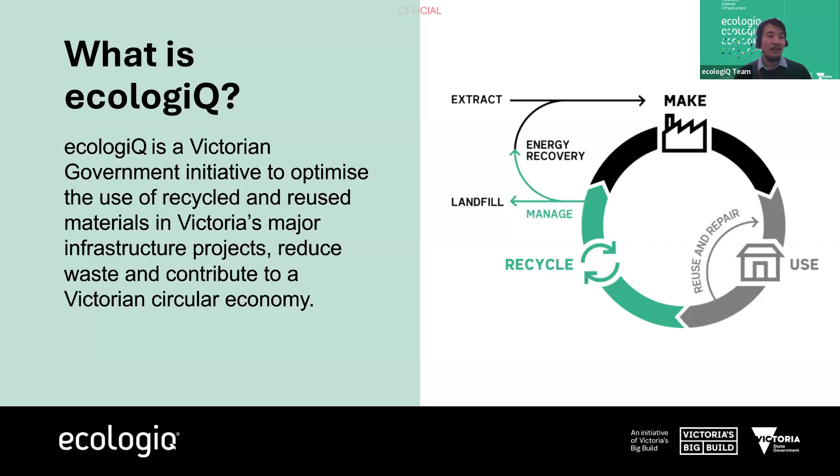We have a huge pipeline of works for the state, and with that consumption, I think how we do that really cleverly means that we can actually keep things at its highest order use and move towards that circular economy for Victoria.

And how the policy works is twofold. For all the road, rail, and tunneling projects that are in place that have this policy, it is about looking at each of these projects and how they might optimize use of recycled materials. We use 'optimize' because it needs to make sense from a carbon perspective, a cost perspective, an availability, constructability - all those elements - again, it's about what's best fit for purpose.

So it's not just about having tunnel vision around using recycled materials, but secondly, a report on the volumes and quantities of those materials, because the insight, the detail, is in the data and in the reporting. And with the updates from July 1, our Recycled First now applies to any Victorian government project of $20 million or more, not just our road, rail, and tunneling projects to date. It actually applies during the request for proposal, request for tender stage.

So it is a procurement policy. And then during delivery of those projects, reporting back to the relevant authorities - whether it's road, rail, or in this instance, the Victorian Health Building Authority - will be capturing data on how much recycled materials and content is being used in their projects.

And to date, we love a good infographic - over 5.8 million tons of materials have been used on the Big Build projects as recycled materials. That's enough to fill 2 MCGs worth. And you can see all the numbers that are there, but I think most importantly, since the introduction of the policy, we've seen a doubled uptake of recycled materials being used on the project. So it is working, having these policies in place.

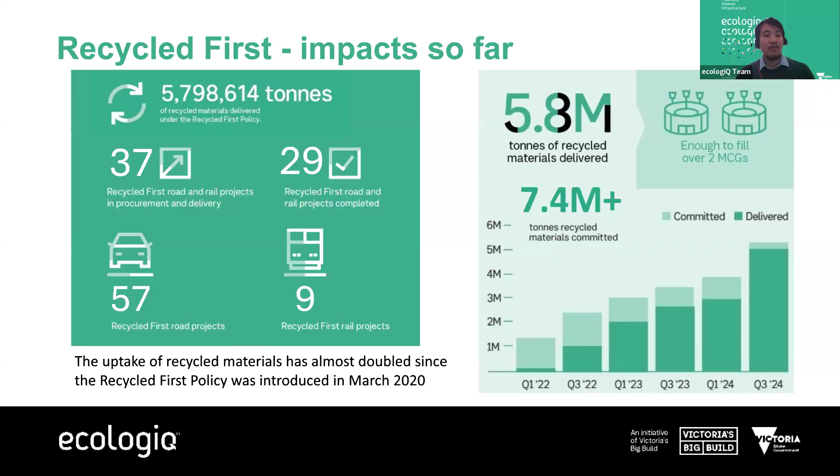I think what that means for you dialing in on this call is that there is a lot of opportunity here for you in the pipeline, and we're here to talk about some of those upcoming projects today.

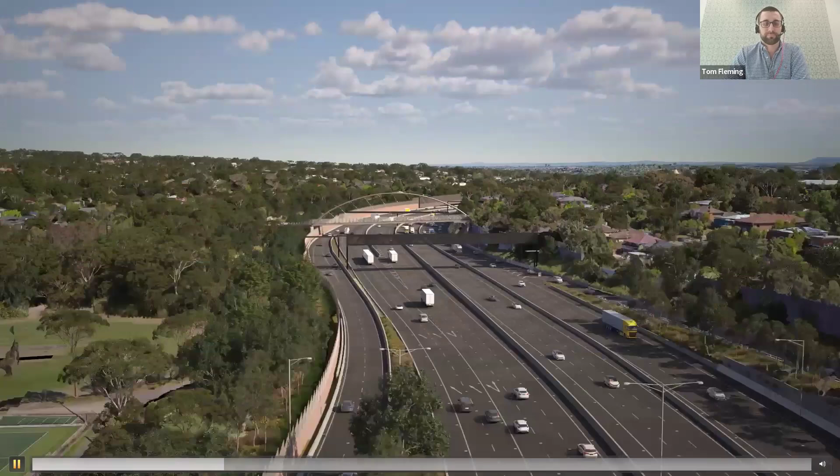We'll stop here just quickly. So we do have the busway that spans across the Eastern Freeway works, a major change that will be coming online. We also have the widening of the Eastern Freeway in general. We'll keep running through this and get a bit closer to our end of the package.

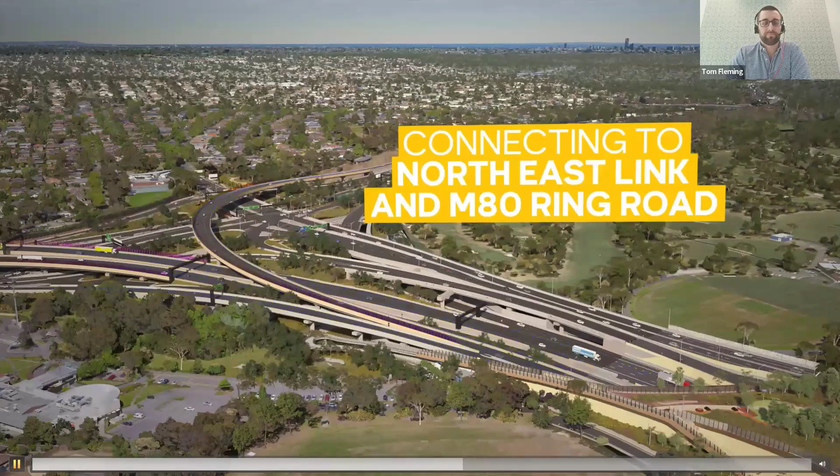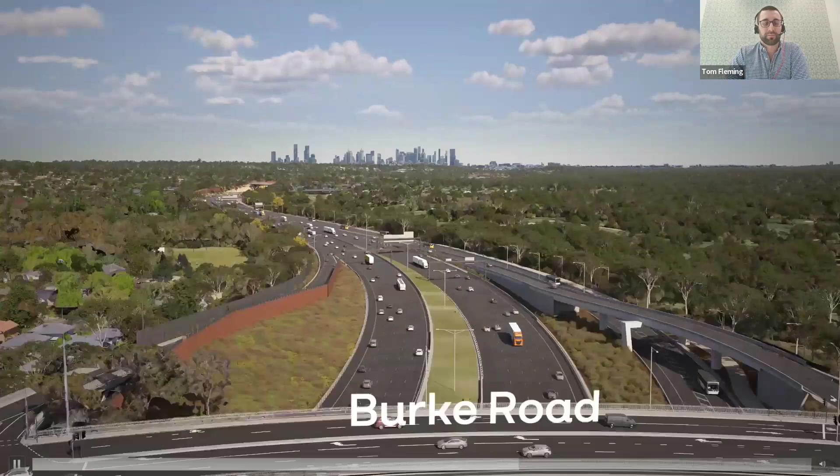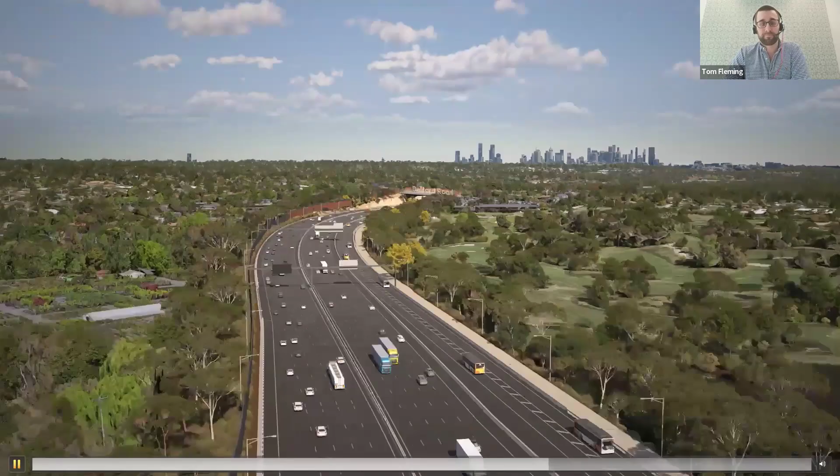I'll pause here. Our package begins at the Burke Road intersection, and we work all the way back towards the city, up to the Hoddle Street end of the job. As I fly through a bit further, a lot of the project will include an upgraded shared use path, creating more connectivity in this area which previously hasn't existed, as well as some extra lanes.

Some of the works here where we have a lot of structural elements is around the Chandler Highway intersection. We have the dedicated busway, which runs mostly on the north side of the road, to the right of your screen. At the Chandler intersection, the busway has a flyover that splits the dedicated busway into traffic, so buses heading into the city and buses heading out won't run alongside each other as we come to this point - that's where they separate. So there's a lot of structural work going on in this area, as you can see from the highlighted bits.

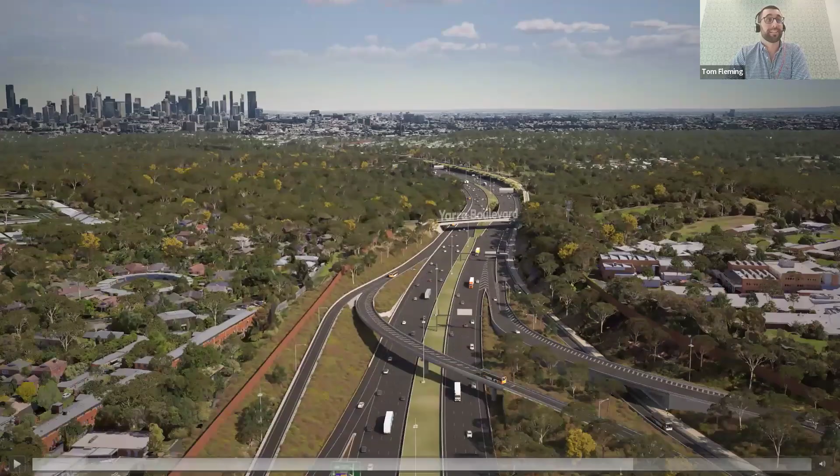One of the other key features we've got is working right over the Yarra River. We have a structure where we're building a shared use path bridge that spans over the top of the Yarra River. It's quite a sensitive area, and it's a big part of our urban design strategy to maximize that opportunity there, which we'll talk about in more detail soon.

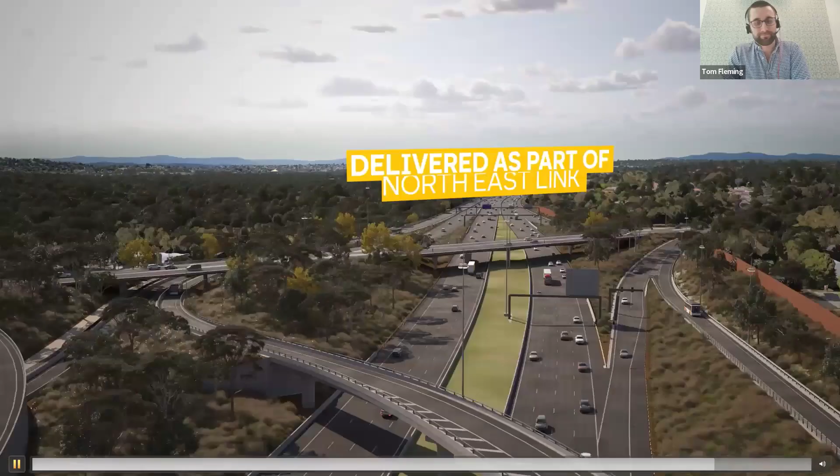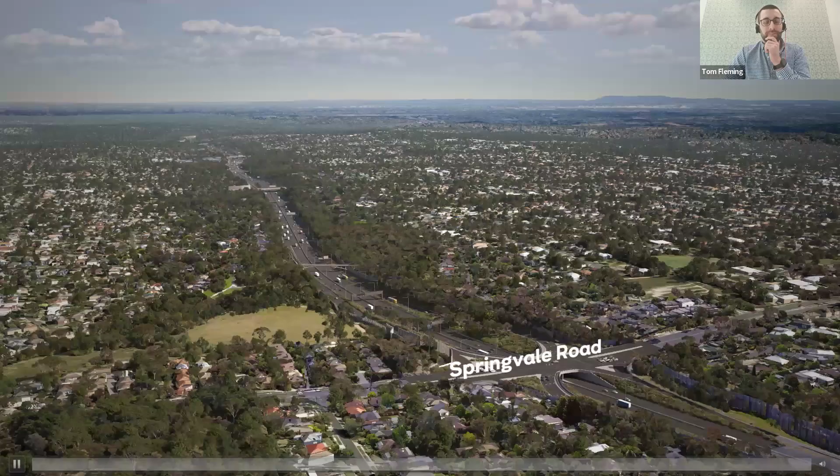All right, so it's a very quick fly through, but hopefully it gives a bit of context of where our project sits in the greater program for the Northeast Link. As this image shows, we do sit down here on the western side of the freeway.

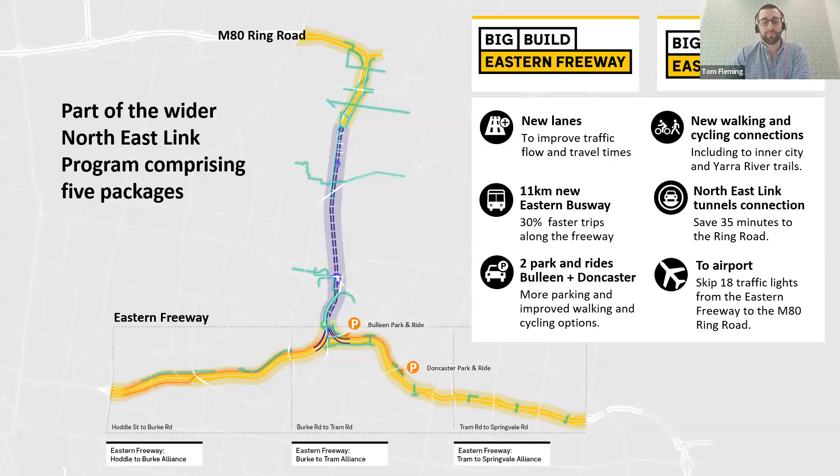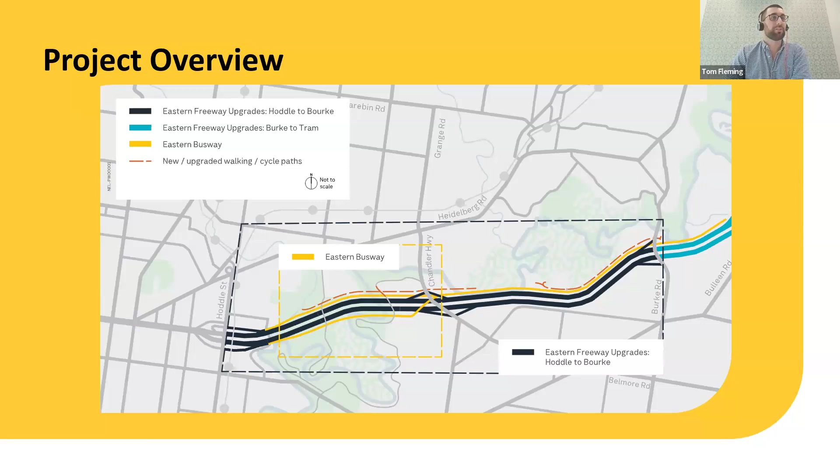This is a bit more of a project overview here. The upgrade of the lanes is highlighted in black. We have the dedicated busway along the yellow lines here, which splits off as we come into the city, and the shared user path runs along the northern end of the project.

Some key stats about the scope and features: it's about 6 kilometres of road being upgraded between Hoddle and Burke, with an additional lane in each direction east of the Chandler Highway, and some new exit ramps at the Chandler Highway and Burke Road intersections. There's also the entire new Eastern Freeway busway, which runs from Merri Creek to Burke Road.

There's an extensive length of shared user paths that will be built to connect pedestrian movement in this area, 3 new road bridges, and a new steel truss shared user path bridge over the Yarra River. Then there's associated work such as upgrading drainage, the inclusion of ITS and retaining walls, and some new noise walls being replaced across the project.

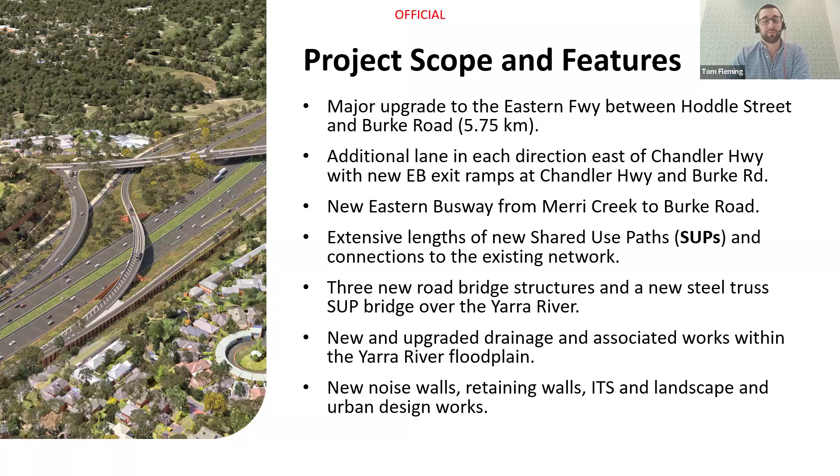Some of the key design themes we're looking at for the project: really respecting the original design of the Eastern Freeway. It was quite an advanced design for when it was first built. If you've driven through the area, there are some really big cuttings where you see a lot of the big rock faces, so we're trying to design into those original themes and the landscape that exists there currently, and improving the active and public transport connections, the busway and the shared user path.

It is a very environmentally sensitive area, especially around that Yarra River bridge area, with some pretty sensitive species around there. A big part of our design has been co-designed with the Wurundjeri Woi Wurrung to try to maximize opportunities of integrating that cultural element into our urban design strategy, and really delivering sustainable, future-proofed outcomes.

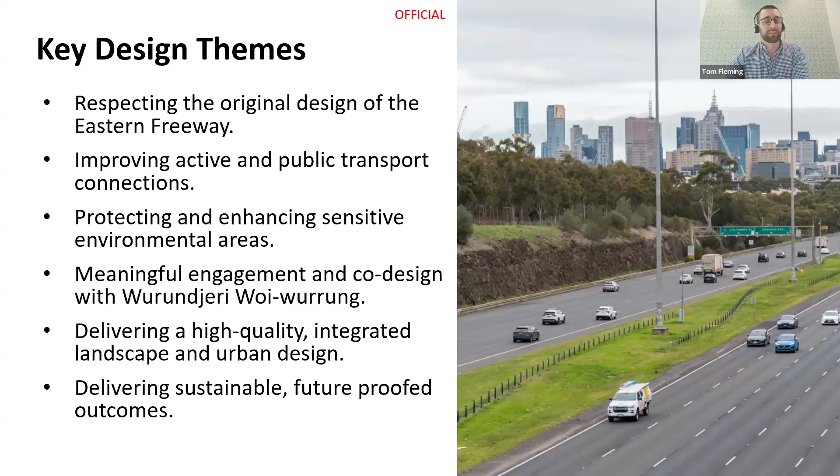These are some of the renders of the project. Some of the interesting elements like the shared user path bridge - it's a large steel truss bridge that incorporates a lot of the elements of our urban design strategy. It's a corrugated Corten steel structure to really tie into almost the tree landscape in the area. That would be a really key feature of the project.

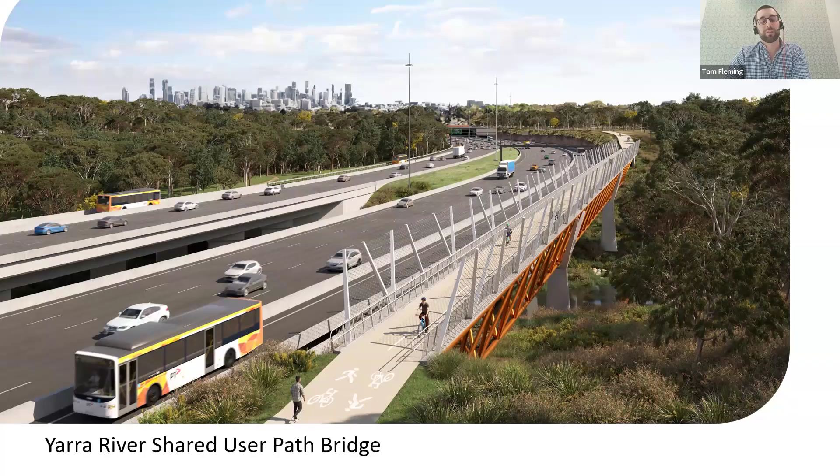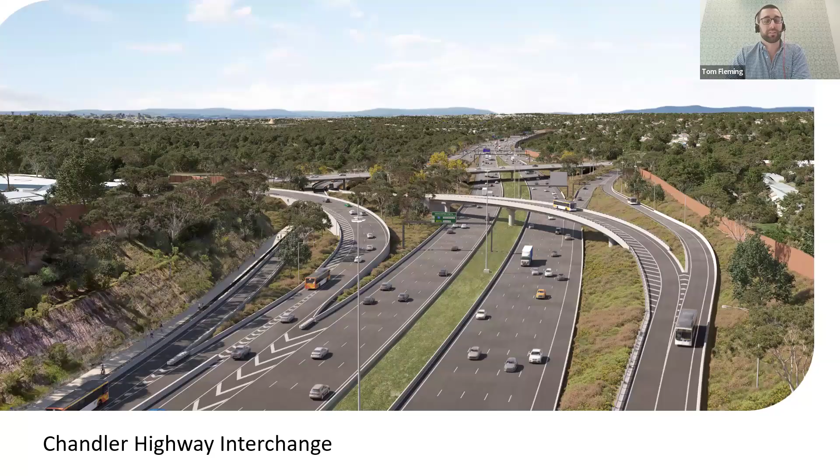Then here, the Chandler Highway interchange is the big aspect, with the busway flyover to separate heading into the city. You can see here as well there's a bit of an underpass for the buses heading out of the city, and these ones flying over to enter from the southern side of the road.

In terms of some of the key design elements and packages we'll be procuring: we have the ITS, which includes the ITS conduits, pits and pipes, along with a lot of the gantries that will exist on the project. Then there are the structures, largely around some of the bridge elements.

We do have a lot of concrete, steel reinforcement, steel box girders, bridge railing, and precast bridge beams. There's a large quantity of asphalt and concrete for our pavements when you look at the widening of the job, and the concrete for the shared user path.

For retaining wall structures, we have some RSS walls, RSS wall backfill, and some L-shaped walls across the project. Then for roadside structures there are gantries, some anti-throw screens for the pedestrian bridges, and a lot of roadside concrete barriers - we'll get into quantities shortly, but it is quite a large portion of the job.

The noise walls are a plastic noise wall, and they're a really key feature in the area for our urban design elements, tying that into the existing landscape. General landscaping across the project will be done as well.

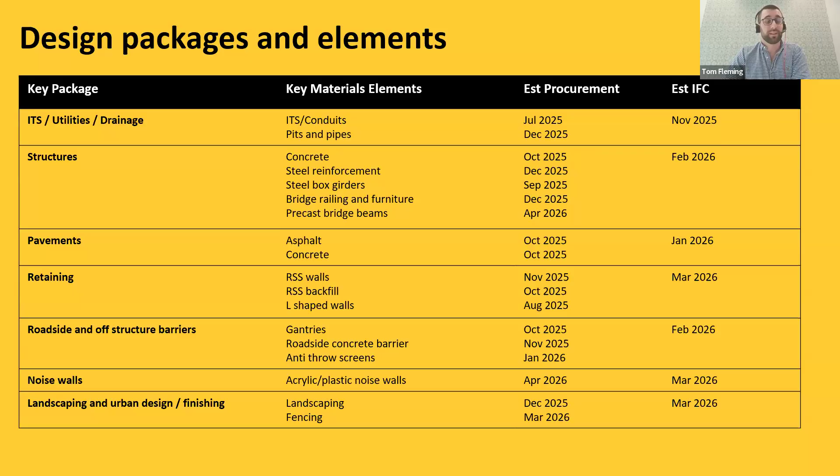Just to give you some context of the quantities we've estimated so far for the project, given we are still very early in design: we've got over 12,000 cubic meters of structural concrete, 3,000 tons of reinforced steel, structural steel in terms of the trough girders being 1,200 tons, and the truss being 100 tons.

For the noise walls, we've got over 3,000 meters, and that's about 20,000 square meters when you look at the panel square meterage. The asphalt across the job is 150,000 tons, and we have large lengths of drainage - 16 kilometers, with 2.7 of that being slip formed, and 250 drainage pits across the project.

As well as that, the barriers I mentioned are a huge aspect - we've got 15 kilometers worth of barriers being installed on the project for that lane separation.

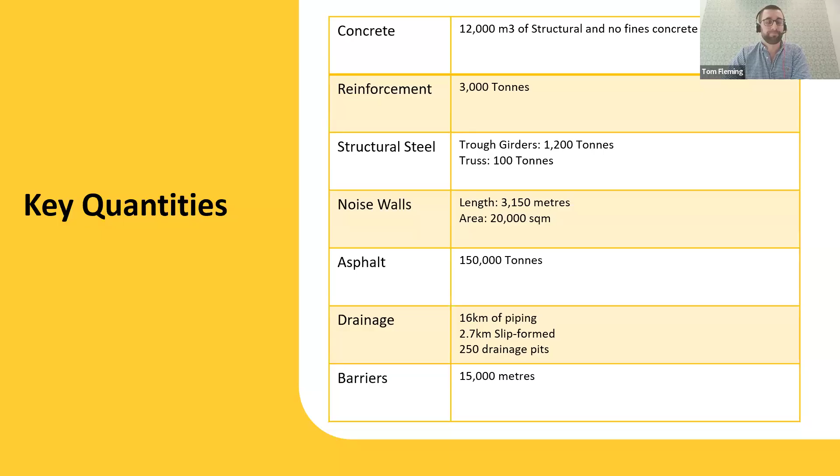This ties back into some of our requirements on the job, and from a sustainability lens, working under the environmental management framework which all the Northeast Link projects will be working under. Some of our requirements here also tie into the IS rating that the project will be undertaking.

In terms of these requirements, we've got a 15% reduction in CO2 from materials only, which excludes any of the on-site energy use across the project. We've got a 40% reduction in Portland cement target, a 15% use of recycled materials, which excludes our RAP quantities as well, and a 50% steel by volume to be sourced from SSA accredited suppliers.

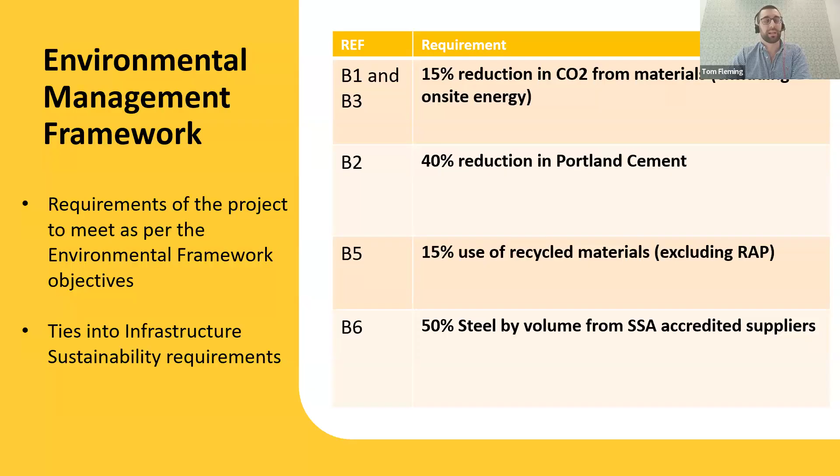So we'll talk a bit about what our resource efficiency strategy is and how we look at achieving some of these targets. When you start talking about the 15% reduction in CO2 from materials, the 40% reduction in Portland cement, and the 15% use of recycled materials, we've got to look at each of the elements on the project and come up with minimum requirements to make sure we are working towards achieving them.

This is a bit of a summary of what our cement replacement strategy is through SCMs. For our piling across the job, the opportunity is to really maximize that SCM with a 70% minimum target. We also have a 50% minimum target for all of our other in situ concrete products and elements, and a 30% minimum requirement for any precast elements on the project.

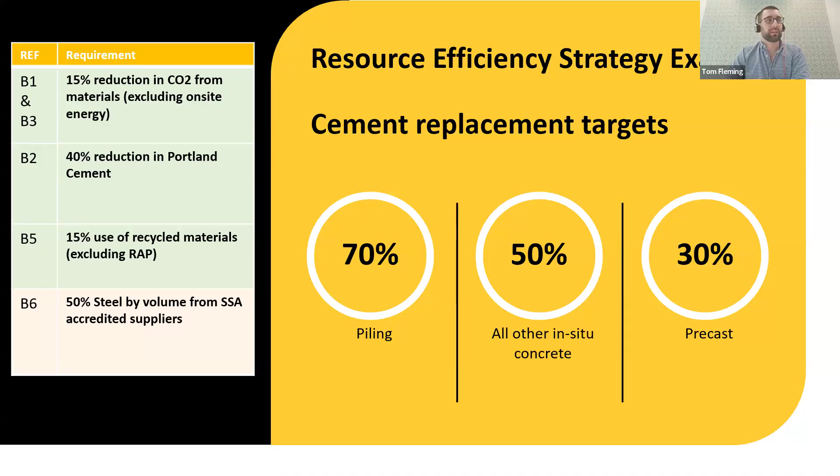This is just a bit more detail on some of our requirements across the job that we'll include in our procurement process for packages involving these elements. We've mentioned concrete, but for our reinforced steel, we are targeting an 80% minimum recycled content. For aggregates, we are trying to push for 100% recycled concrete.

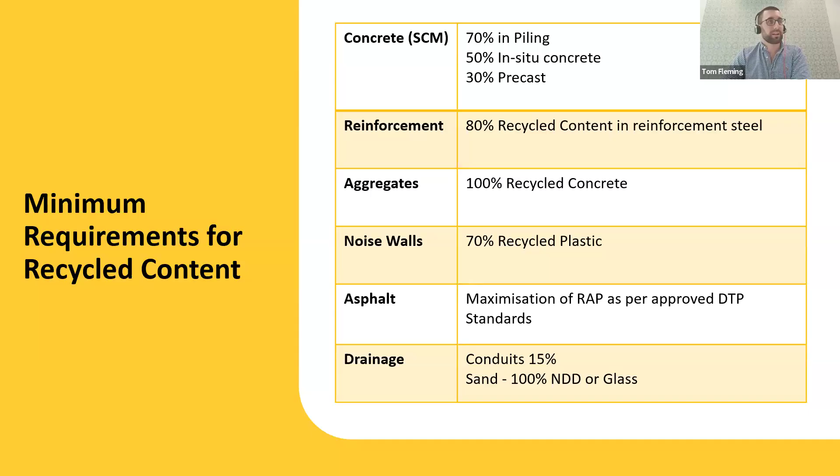In our noise walls, also a 70% recycled plastic content. In terms of asphalt, just achieving our maximisation of RAP in the approved DTP standards. And when we look at drainage, we've got conduits and some of the drainage backfill sand, which will target a 15% recycled content in the conduits and 100% recycled sand, whether that be NDD, recycled sand or glass.

I think just to wrap it up here, some of the initiatives we have been looking at to try and achieve some of these targets. I'll cover off a couple, but eco straps for the RSS walls, which is a good reduction in steel and the ability to use some site-won materials backfill.

We did mention the plastic walls here, with 70% recycled content. Megaflo Green we're using across the job, which utilizes HDPE recycled milk bottles and has improved drainage performance. Sense600, which has a 39% reduction in embodied carbon, as well as an additional 16.6% recycled content from their typical reinforcing steel. We do have some elements where we're looking at GFRP posts to replace traditional steel.

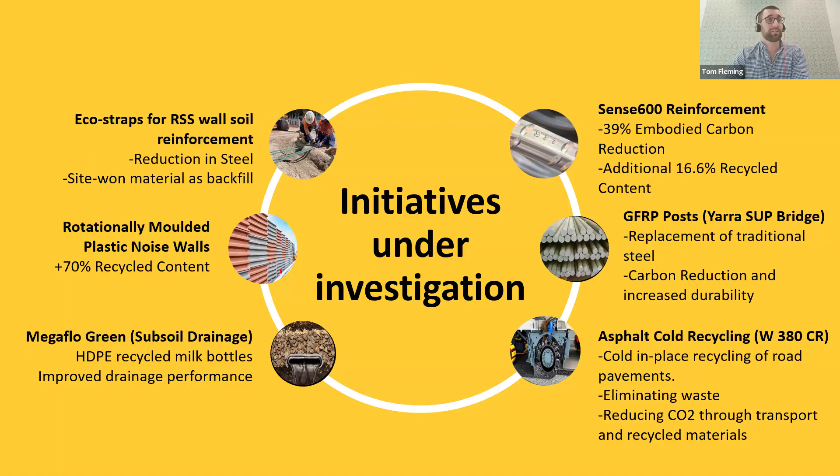And then we've also got the opportunity for asphalt cold recycling on site, which eliminates that RAP entering the waste stream and allows us to reuse it there on site, reducing more CO2 from not having to transport the materials to and from site. And that's essentially it for our project.

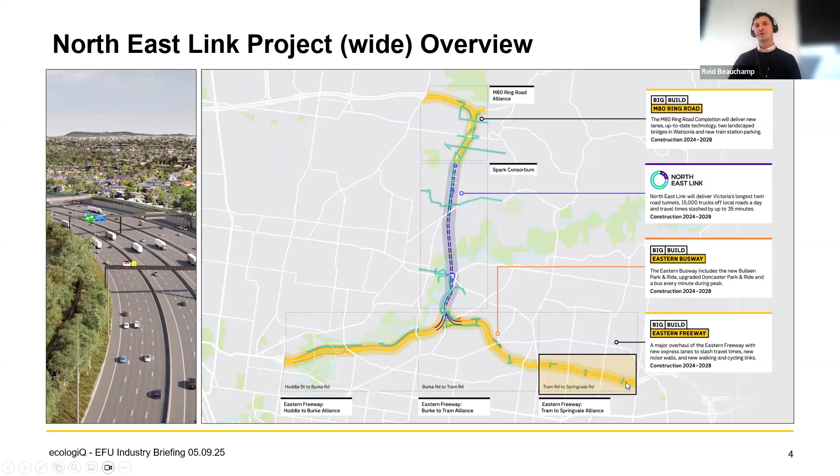We are in the midst of design, so we've been undertaking site investigations along the freeway to inform our design and planning. Design is underway across a variety of disciplines, and procurement activities have begun. Throughout September, we'll be setting up work sites and rolling out safety barriers to support some of the major upgrades. Design will ultimately be undertaken through June of next year for a lot of the key packages.

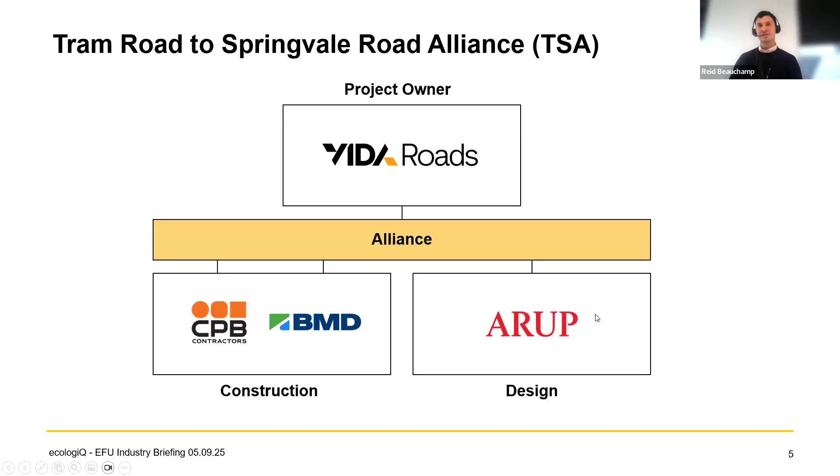So who are we? TSA, the Tram to Springvale Road Alliance, consists of ARUP on the design front, with CPB and BMD supporting construction, and working closely with VIDA Roads on behalf of the state - an alliance model to really support a collaborative delivery approach for this project.

In addition, it has noise walls, similar to how Tom was able to show in his presentation. We've got some rotationally molded noise walls, as well as existing noise walls we've been able to retain, and some concrete noise walls to support flood mitigation as well. There is landscape activity and design across the alignment that supports some of the broader shared user paths activating those areas.

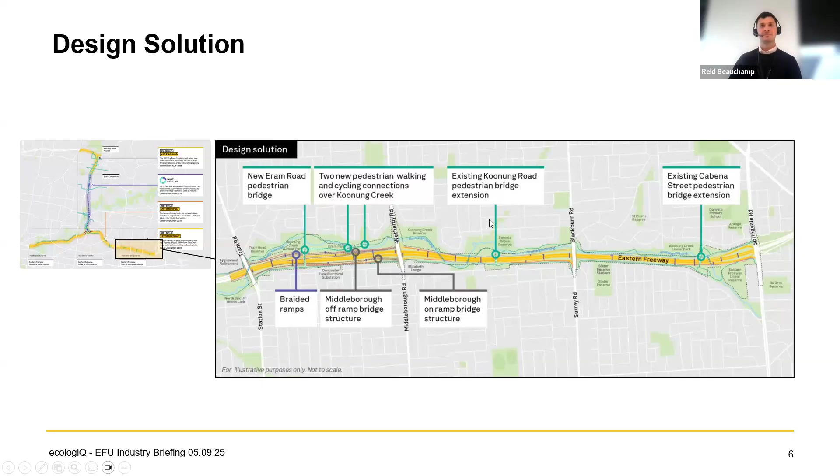We have ITS, or Intelligent Transport System infrastructure, being designed all the way through commissioning, and we have express lanes and collector distributor carriageways across the alignment. Lastly, as part of pedestrian connectivity support, there is replacement of pedestrian overpasses and extension of some existing pedestrian overpasses as well.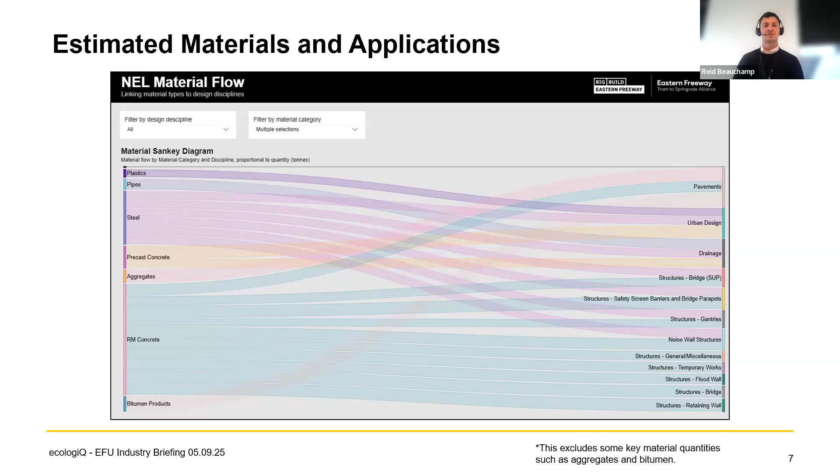We have about 200,000 tons of concrete that we're looking at for the project, a significant amount of asphalt and aggregates, as you would expect. And we have a similar quantity of steel, both for reinforcement on existing structures and walls along the alignment, as well as plastic noise walls and piping across the roughly 5 kilometers of project.

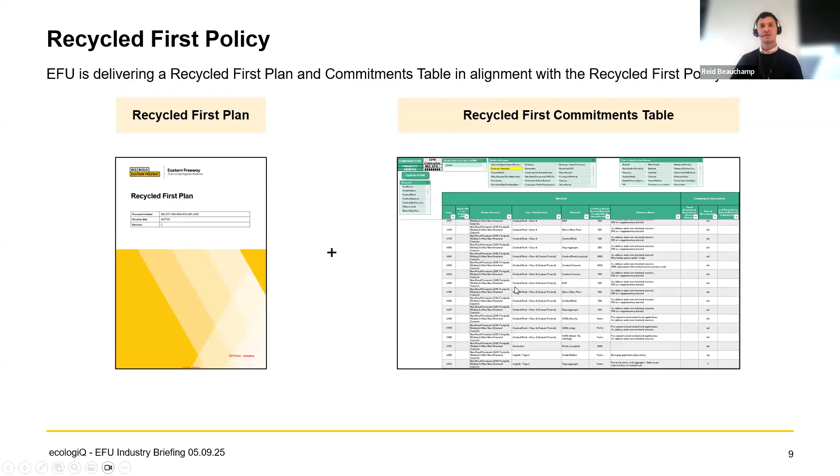Because we've been pursuing this in alignment with the Recycled First policy, we've developed our plan and commitments table, which is ultimately a tool for us to identify opportunities and really prioritize the adoption of recycled and reused content products across the project. I'll get into that in just a moment. But it's worth acknowledging that reusing resources and materials and prioritizing recycled content products really helps support a number of the project targets we have.

Similar to Tom, some of these targets are included within our project requirements and specifications. In addition to having a broader recycled material target of 30% across all materials, it's also a key contributor towards our material impact reduction targets, our Portland cement reduction targets, and prioritizing reuse is really helping with waste diversion as well. We are looking to prioritize sustainably labeled products, so wherever there are EPDs and disclosures that improve transparency within the supply chain, that's something we're really trying to prioritize. Ultimately, any solution we look to adopt, we want it to address as many of our targeted outcomes as we can.

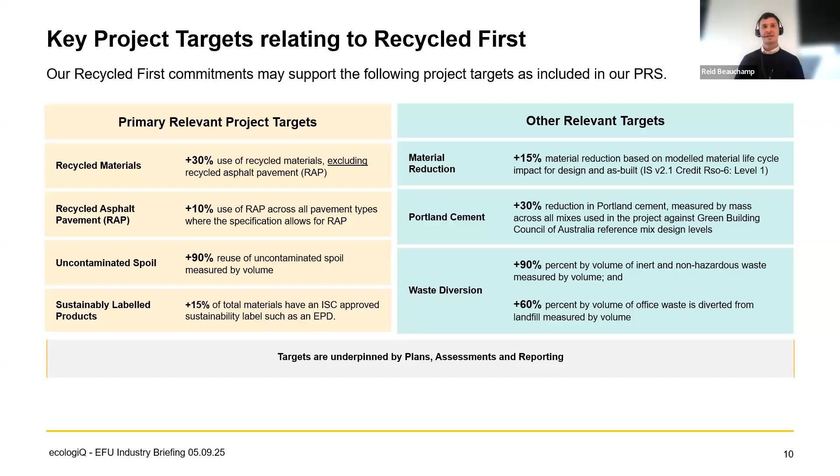So we've split some of the opportunities up across application areas. We have 6 application areas that we use with these little visual diagrams to simplify and give an overview of the opportunity. We'll start with our civil and pavements, run into drainage, services, some structures, and of course our earthworks, landscaping, and urban design aspects for the project. And then there are a variety of smaller but still important construction activities and temporary works scopes that we want to acknowledge as well.

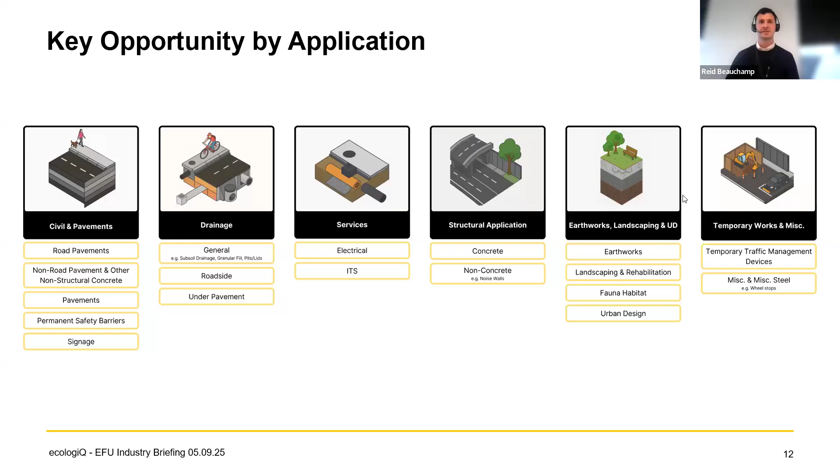Across the alignment, of course, there's a lot of pavement, a lot of civil work. So we are looking to maximize the recycled content allowable across that for all of our asphalt types. I've noted some of the key types, VP, H, type SS, and SF. And we're really trying to adopt the maximum that we can with what's allowable within standards, and looking at that for our subbase as well.

So our asphalt and all of our aggregates that make up the core of the pavement, we're looking to maximize the recycled material for, as well as looking at some of those high impact areas like our concrete use. Really looking at our cement replacement with supplementary materials across in situ, precast, and larger elements as well, like piling.

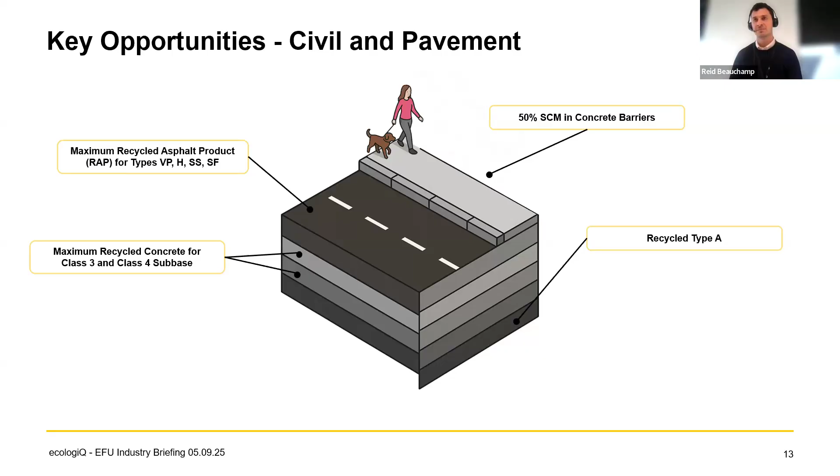For our drainage, we have quite a lot of reinforced concrete pipes, so varying classes, class 3, 4, 6. And we have some recycled plastic, like subsoil drainage, that you'll see along the alignment as well. A number of concrete pits, concrete culverts, head walls, geotextiles or geosynthetics. And a big piece of this is just trying to get the details right.

Like, of course, we have a lot of concrete on this, as I mentioned. And so we've really been looking to target that and get those commitments integrated throughout design documentation and throughout our procurement.

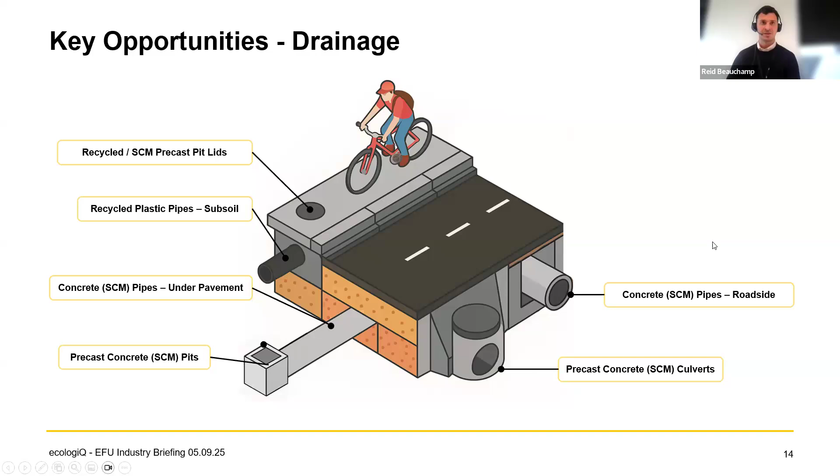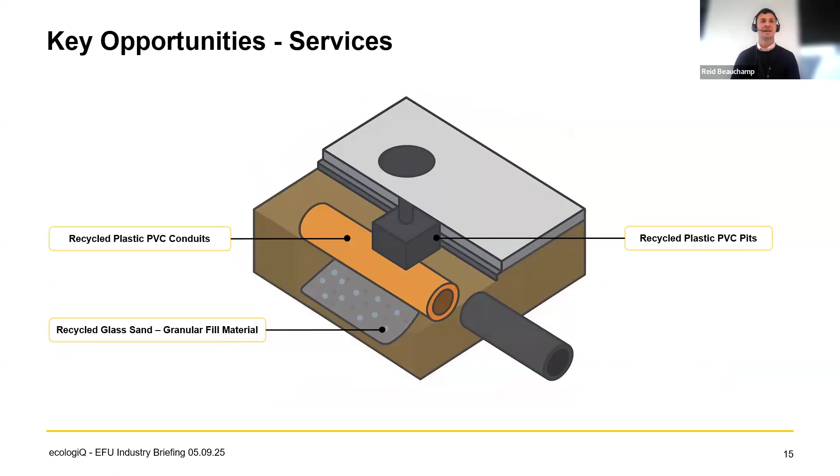For services, we've got services all the way up and down the corridor. So looking to maximize the recycled content within those PVC conduits to the extent that's available, as well as the aggregate, both for backfill and recycled glass sand.

For a number of our structures, we have everything from large noise walls to some flood walls. We've got large piers, abutments, and bridges. As I mentioned before, each of these are being targeted in a similar fashion to what Tom had presented there, looking at different types of applications.

And we have set targets for our precast at 40% as a minimum, 65% and above for our in situ concretes, as well as big elements and piling. So that's, again, targeting those high impact areas where we can and trying to dial up the replacement as feasible.

And then things like slabs, shared user paths, we might have 50% or above. And of course, with our large extent of noise walls, we're looking at rotationally molded plastic and maximizing recycled content within those plastic walls.

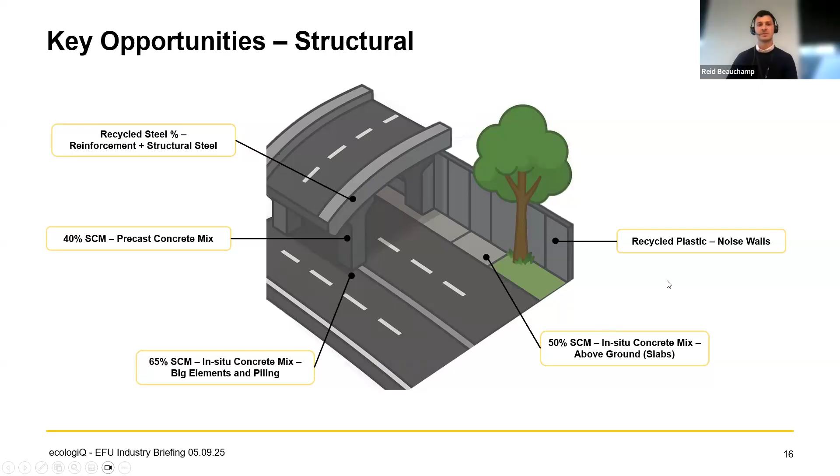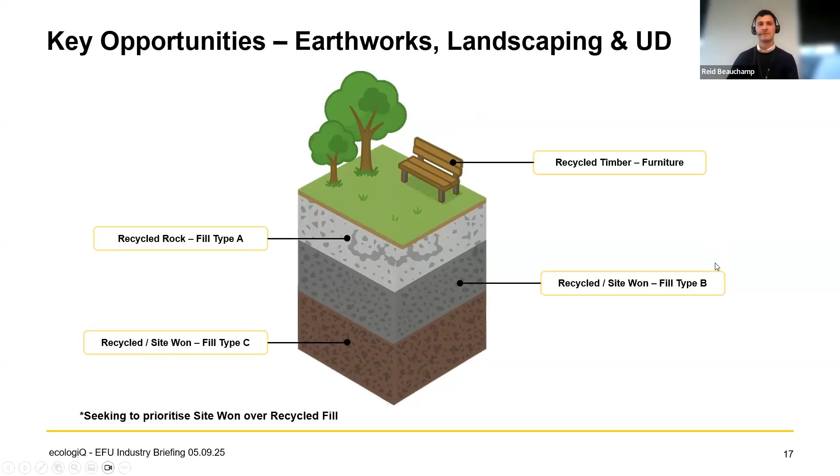We're really trying to prioritize as much reuse within the project boundary as we can, but of course where we're needing to import from elsewhere, we're looking at recycled content for everything that we can.

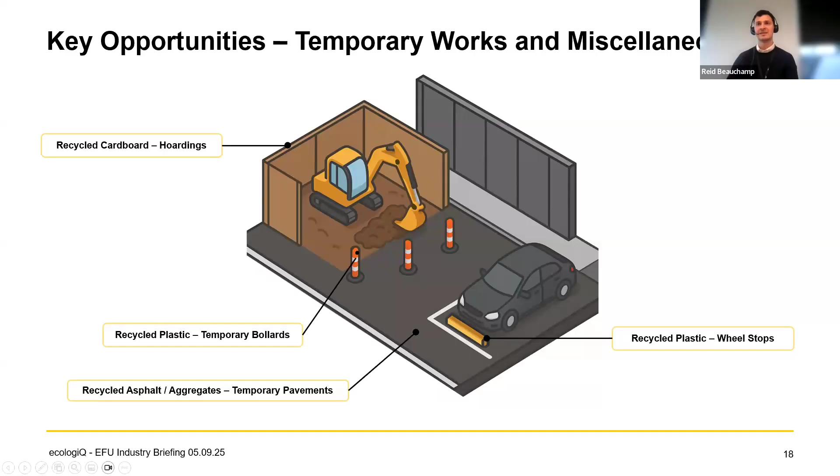As far as what opportunities you see, and if anything in alignment with this scope seems like an opportunity, if we haven't already been in contact, it would be really great to unpack each of these opportunities a little bit further. So that's it from me. If anyone has questions.

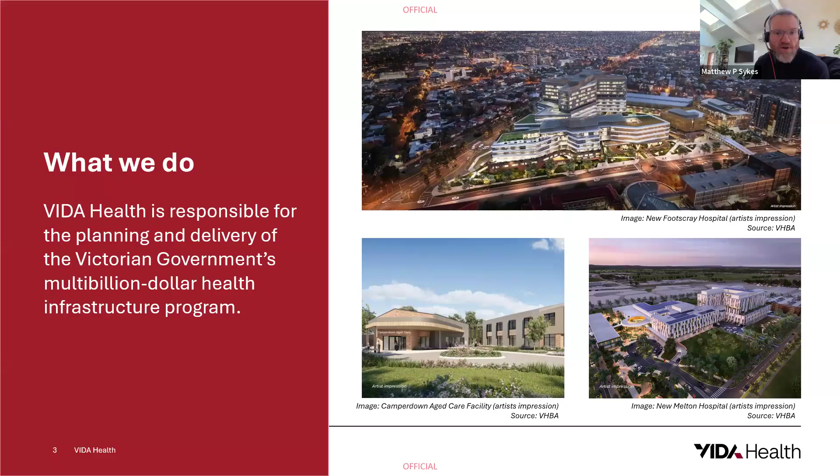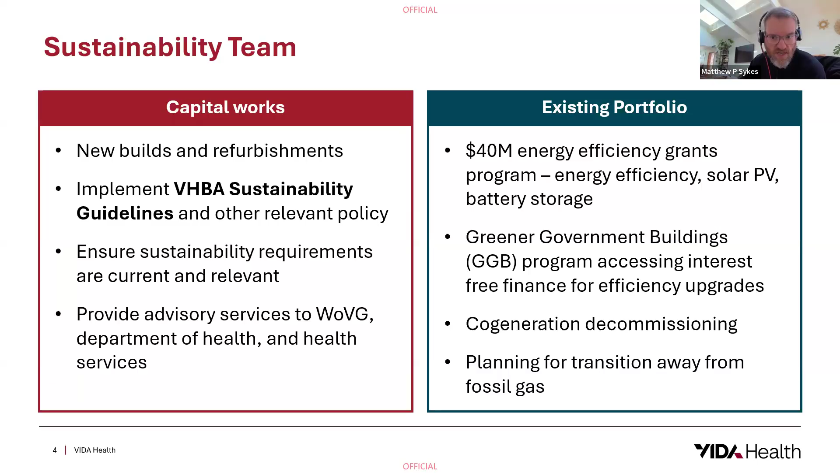I'll now hand over to Rachel, who'll talk a bit more about the expansion of Recycled First to our sector, and how that's going to impact our projects going forward.

Great, thank you Matt, and hello everyone. We're excited to see the Recycled First policy being expanded to all government infrastructure projects and look forward to seeing the benefits of this in the health space.

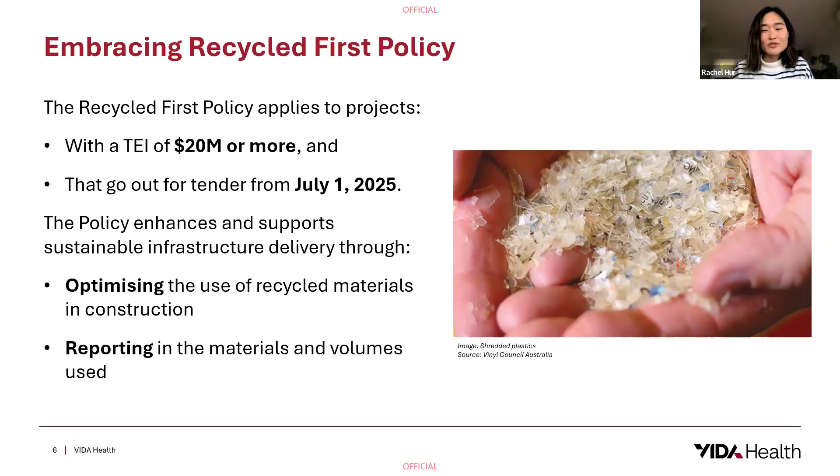At VIDA Health, we're excited to be implementing the policy as it enhances existing requirements for recycled content in health infrastructure, provides opportunities to optimize the use of recycled materials, and includes all the processes required for reporting. As Matt mentioned, the VHBA sustainability guidelines are an existing set of guidelines applicable to our capital works projects, and these already include requirements for recycled content, though in a limited capacity, for example in asphalt or curbing. So the policy is a great opportunity for innovation across other building materials, such as vinyl, which is just one example of a very widely used material in hospital and clinical interiors.

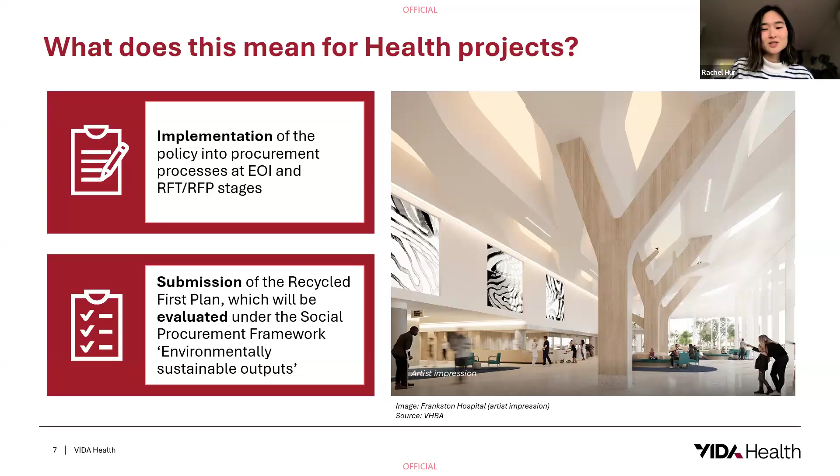Additionally, there are already requirements to include some recycled content materials under the sustainability guidelines, as mentioned previously, and projects may have already considered additional opportunities for recycled content materials in the design phase, specified in contract documents. Within the Recycled First plan, these can be included as commitments, though tenderers are still encouraged to demonstrate further innovation.

At VIDA Health, the way we do procurement is that materials are not specified or directly procured by us, the agency. Instead, materials are either specified, or there are performance requirements within the contract documentation packages, whereby suitable materials are then procured by the contractors.

So how can industry be involved? Firstly, you can make yourselves visible to builders tendering on projects, demonstrating understanding of the policy intent and requirements. Secondly, industry can work with or seek assistance from the ecologiQ team, who are very friendly and helpful. Lastly, they can seek opportunities to showcase capability and advocate for recycled material optimization.

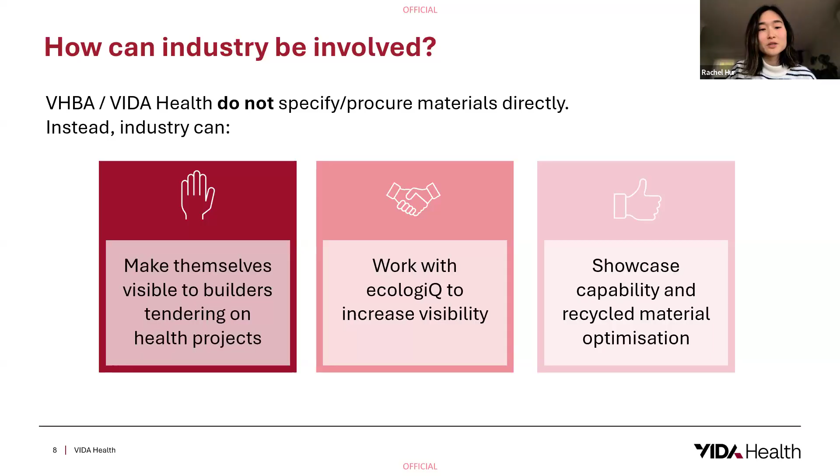I'll now pass over to Lauren to present a health case study where recycled content materials were successfully implemented, even prior to the announcement of the policy expansion.

Thanks, Rachel. I'll be giving an overview of the Frankston Hospital redevelopment. This is a $1.1 billion project delivered through a public-private partnership.

The redevelopment will deliver a 12-story clinical service tower, 15 new operating theatres, and expansion in additional care and service areas. It will also have the capacity to treat 35,000 more patient episodes each year.

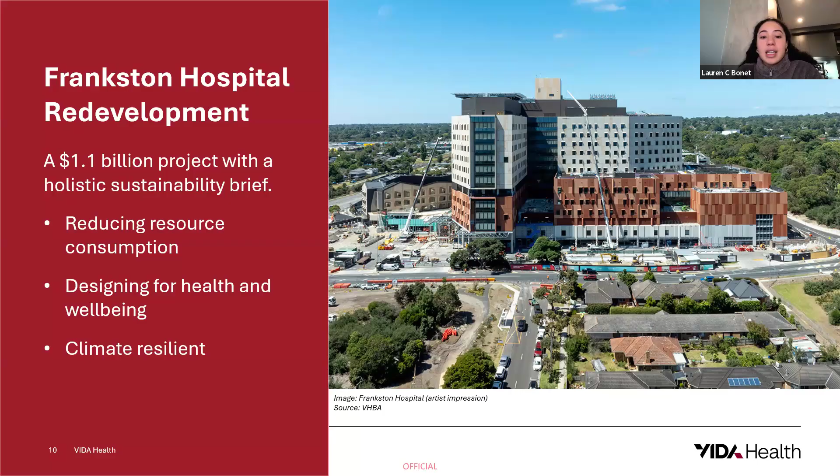The brief for the project reflected a commitment to environmental outcomes across design, construction, and operation. The sustainability brief had three core priorities: reduced resource consumption, improved health outcomes, and climate resilience. This translated into specific strategies such as waste reduction and extensive use of recycled materials.

From the sustainability brief, the Frankston Hospital redevelopment delivered a number of outcomes. The project team prioritized recycled materials across construction and achieved quite high levels of recycled content in things like concrete, insulation, flooring, and outdoor elements.

Additionally, waste reduction was a big success, and a standout initiative was the partnership with flooring contractor ResiLoop, who collect offcuts from vinyl flooring and recycle this locally into landscaping products. From this project, 6,450 kilos of vinyl flooring was recovered.

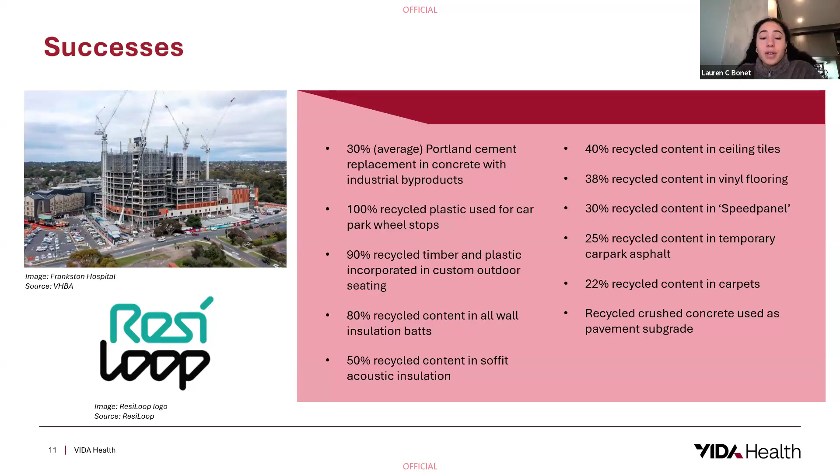While the project achieved these sustainability outcomes, it also faced a few challenges. A big hurdle was sourcing locally manufactured products with recycled content due to the limited market here. Additionally, meeting health-specific requirements for things like durability and infection control was difficult at times. There were also some limitations in transparency.

Many products lack clear data on recycled content or sourcing. There were also regulatory constraints, as some standards restrict the use of recycled materials in certain applications like pressurized pipes. In some cases, materials with recycled content didn't meet the aesthetic requirements needed for the project, as was the case for the external footpaths. Lastly, there were at times conflicting sustainability drivers, balancing things like local sourcing and low embodied carbon.

The challenges faced in using recycled materials highlight a big opportunity to drive demand and raise awareness for recycled content in health infrastructure. Hopefully, by creating strong market signals, we can encourage manufacturers to develop new building products tailored to health settings and address those challenges, which is especially important here in Victoria, where the options can be quite limited.